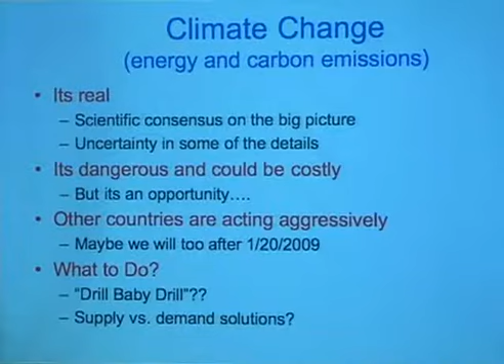The pathway that's missing here, and that I'm the proponent of, and lots of others as well, is the end use side. In our lab we have a $500 million program to develop biofuels, which is great, and I hope they're successful. But where people miss is, where does all that energy go? Why are we building power plants, and why are we doing solar, and why are we doing biofuels? A big part of the answer to that is energy efficiency in buildings, especially if you look at the carbon issue.

Now, there are other options for carbon. There's a lot of interest these days in the nuclear side. I understand there's a big program here on that, there's some work at Berkeley. A little known part of my history is I was once involved in the nuclear field as well.

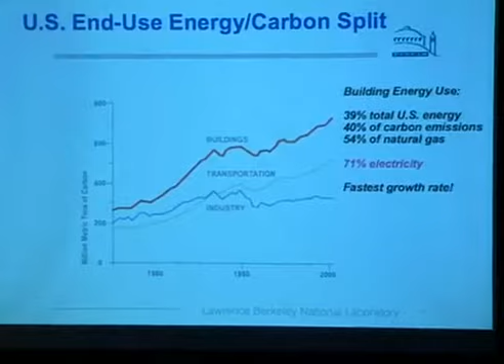So let's talk about the picture. Those of you that are on the building side probably know this, but it's surprising how many people don't understand it. If you talk about what the energy issues and problems are, people think about cars first. But building energy use is the single largest end use out there.

It accounts for about 40% of energy and carbon. It accounts for 70% of the electricity. So it's a huge issue, and it's also the fastest growing area.

By the way, all of these comments are as of a year or so, or the last six months to a year. A lot of things are changing in the building sector now, as they are in the rest of the economy. In the long run, though, these fundamentals aren't going to change very much.

If we then look at the buildings problem, we're back to the same issue: your perspective on this depends on who you are and how you look at the problem. If you ask a utility person what the energy in buildings problem is, you get a very different answer than if you ask a building owner, an architect, or an engineer.

That's a challenge, but it makes it an interesting one because there are lots of different ways to approach the problem. It would be nice if there was a silver bullet—do one thing and solve the energy problem in buildings. The answer is, it's not possible. At best, people have used the term 'silver buckshot.' You need lots of different things to tackle lots of different parts of the problem.

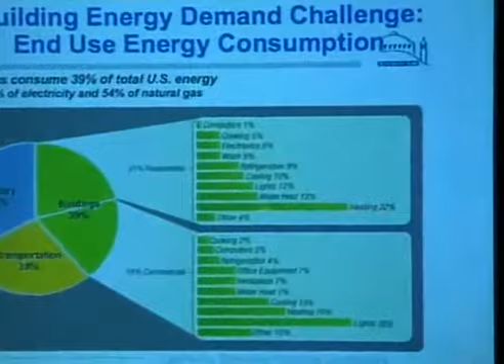That's because if you drill down and break this 39% of buildings into residential and commercial, you find that although there are a couple of biggies—heating in homes, and heating, cooling, and lighting in commercial office buildings—the energy gets used in lots of different ways. If you're going to tackle this problem, you need to understand and ultimately tackle many of these different issues simultaneously.

Stepping back for a second, you look at this building sector—it's diverse and fragmented. The way buildings get built is very complex, with lots of people involved in the decisions. There's not one person to go convince to do an energy efficient building. There are dozens or hundreds. The decisions involve large amounts of money and long periods of time.

It takes—a building like this might take 3 to 5 years from the time someone says, 'let's build it,' to the time you occupy it. Lots of decisions get made there.

And then there are lots of different subtleties in the sector. If you own or lease a building, the dynamics are very different than if you rent or lease it. Buildings are different by region and by type—a restaurant is very different from an office building. The thing that unites all of them is that the potential for savings is enormous across all of these.

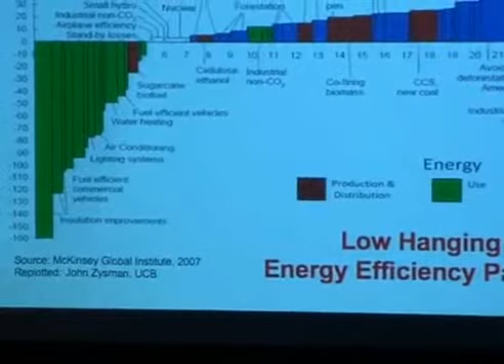Which is good news. Now, there are lots of studies out there—there have been for the last decade. A few recent ones, like the McKinsey study, some of you may have seen. What this is doing is estimating, on the horizontal scale, the amount of carbon—meaning energy—that could be saved by various actions.

And then it does an economic analysis on the left scale here of the cost. This happens to be in euros per ton of carbon, but think dollars per unit energy, dollars per unit carbon. What you see is rather striking: a whole bunch of things that cost you money.

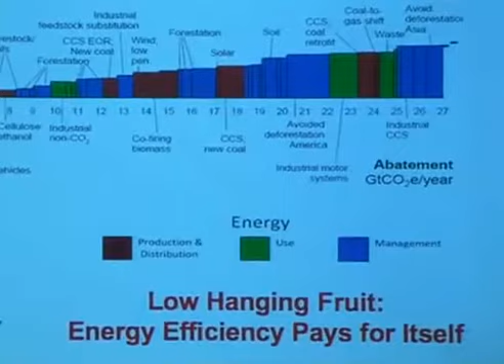Solar, reforestation, carbon capture—all this stuff out here will save a certain amount of energy, and it'll cost anywhere from $10 to $30 or $40 euros per ton of carbon. Look at the things over here that are highlighted in green—these are the things that pay back. They don't cost you anything over time.

And essentially all of these, almost all of them—there's a vehicle one in here—are things to do in buildings. So if you want to save relatively large amounts of carbon, 5 or 6 gigatons here, you can invest in energy efficiency in buildings, and the good news is it pays you back.

So the standard argument here is that this is the low-hanging fruit. This fruit isn't even low-hanging—this fruit is on the ground, and it's been on the ground for so long it's actually rotting at this point. I mean, why wouldn't a rational person make these investments?

You can get 10, 20, 30% ROIs here. Why wouldn't a rational person do that instead of getting negative 20% on your local hedge fund or something? But this has been in place for a long time. McKinsey published this last year.

Those of us who have been doing this for a while have published things like this for a very long time. It's important to understand this, because when you talk about technical potentials, they're huge, but then you scratch your head and say those potentials have been around for a long time. Why aren't we capturing them? And if we're going to do even more, we need to be thinking about that clearly.

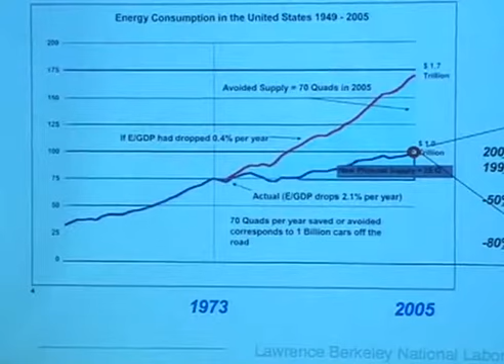Now, the good news is we've actually captured some of them. Here's the energy use in the economy. This is total energy use from the 40s or 50s up to 1973. The blue line is actual use. Something structurally happened around 1973 - the first oil embargo. If you look at energy use per unit GDP, had we continued at that rate to the current time, it would have been the red line. But in fact, it was the blue line.

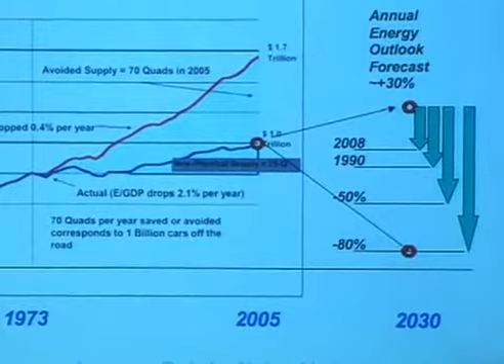So at current costs, we spend about $1 trillion a year on energy. We would have spent $1.7 trillion. So we're currently saving $700 billion a year because of the work we've already done in energy efficiency. The bad news is we just gave away that $700 billion to the banks, but that's an annual amount that gets regenerated every year.

Now, where are we going in 2030, which is a convenient number? It's far enough out to do something and see some growth. If you project current growth, you get a 20 to 30% increase out to 2030.

What people are arguing for - Kyoto says let's get back to 1990 levels. California has a requirement, actually by our Republican governor, to reduce carbon emissions by 80%. Actually, that's cheating a little bit - it's out to 2050. But massive reductions out into the future.

So we did this for a while. We did that for a while. Now what we're arguing is we need to do that for a while. We've never done that before. Never been done in history. It's a big change. It's doable. That's the good news. The bad news is you aren't going to do it by business as usual.

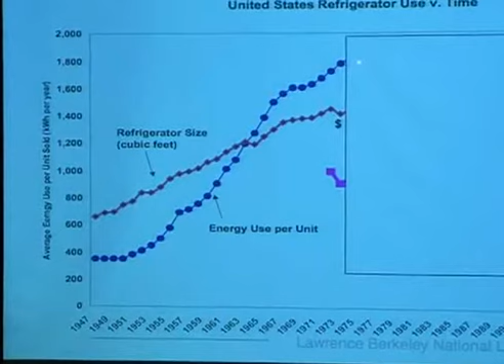Energy use per unit fridge showed a monotonic increase for all that time. Partly because they got bigger, but notice the slope of this is greater than the slope of the increased size. This is amusing too - of course if you extrapolate the size of refrigerators 50 or 100 years, they get bigger than houses. The real constraint, I think, is the size of a doorway in terms of what you can move through.

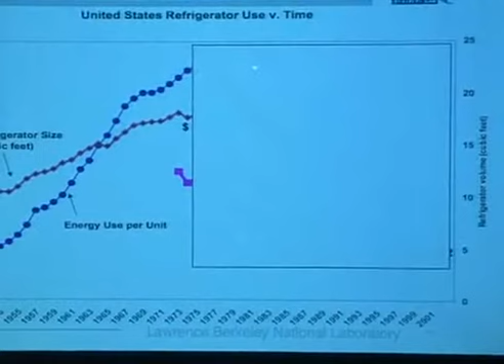Anyway, anyone want to guess - I'm going to pull away this blank piece of paper here. What does this energy efficiency curve do? Does it rise? Obviously doesn't rise too much because it's off the chart here. Does it rise? Does it slow down? Anyone want to hazard a guess? Some of you have seen this before, right?

Dramatic reduction. Okay, fridges today - a fridge you buy today uses about 20 to 25% of the energy of one you bought in the mid-1970s. And that's a lot of R&D and good product development and good design.

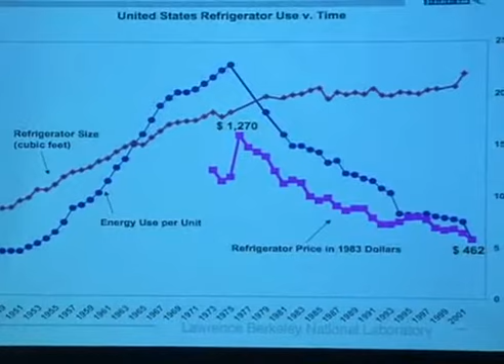And then you say, okay sure, but we did it by vastly increasing the cost of the refrigerator, making them unaffordable to everybody, right? But look at the cost of refrigerators - these bounced around in 1970. The cost in constant 1983 dollars has gone down as well. So bottom line, we saved 80% of the energy use of this energy-consuming appliance, and we did it at lower cost.

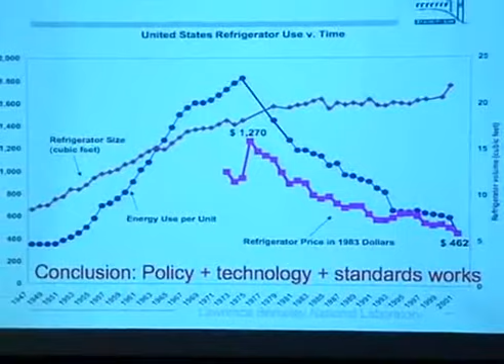So simple question: if you can do it for a fridge, why can't you do it for a building? Why can't you do it for the whole economy? One reason is how this was done - it wasn't done by innovative R&D guys saying let's just do all this R&D and put it in the fridge and hope you all buy it. A lot of it was driven by policy and mandatory standards, and I could do a whole talk on that.

We have a big group at LBL that does policy. We helped develop the new appliance standards for DOE for the last 25 years—there's 5 or 10 appliances like this, not all as dramatic. What happened was the states and the feds decided they were going to mandate it because it was cost effective. They did it, they worked with the manufacturers, and that's the end result.

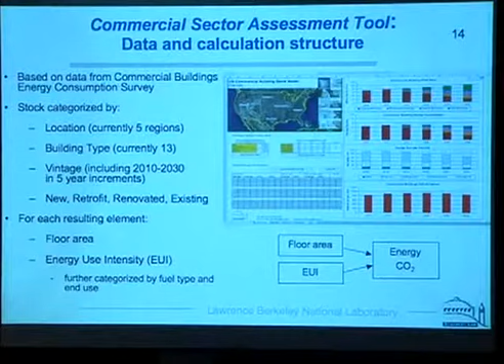So one of the things we've done is a lot of modeling and simulation of individual buildings in the sector. This is a spreadsheet tool we put together to basically look at the energy use efficiency or the energy use index of all buildings and the floor area, and project them out into the future to look at energy and carbon. This model works by building type, by vintage, and so on and so forth.

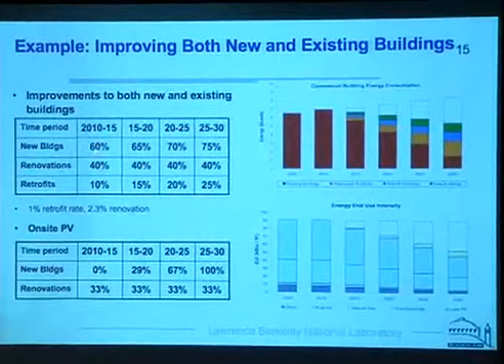Let me show you some results here. So here's a scenario, 2005 and 2030, where for each 5-year time period we make some assumptions. New buildings in the next 5 years are 60% more efficient than they are now—they use 40% of what they use now—and by the time we get out to 2030, they're 75% more efficient, using only 25% of what they are now. We also make assumptions about renovations and retrofits, and about the remaining buildings putting some PV on the roof.

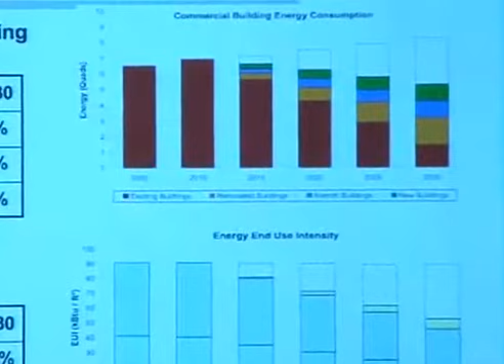And again, this is a spreadsheet, you can play with it. So this scenario generates this stock sector curve. This is business as usual—it would have grown by about 25%. And in this scenario, we end up with savings of about 30 to 40% compared to where we would have been today. And then this shows how the end use breaks down.

The yellow here is solar. So with this as a model, we've done a lot of simulation and modeling. Oh, I want to make one more point here.

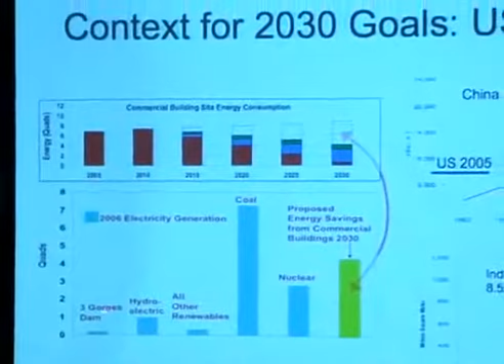So what does this mean? Here's a version of the curve I just showed you. The amount we'd save in 2030 is roughly - this is a little bit cheating because it's compared to today's use - more than the entire output of the nuclear power plant fleet in the U.S. today. So we can save more in the next 20 years than the entire nuclear system puts out today. It's about half of all the coal-fired power plants in the U.S. today, and it's far more than all the hydroelectric, all the renewables, Three Gorges Dam in China, and so on.

Now, China's interesting because as important as it is for us to do a good job in the U.S., if China and India don't do something similar, we'll never get our way out of the carbon problem.

Here's some growth curves for China and the U.S. The U.S. commercial building stock is around here in square footage and growing at a pretty slow rate, 1 or 2%. The Chinese growth is up in the double digits, maybe a little bit less these days, but massive increases. And if these increases in square footage aren't done in a super efficient way, then we might as well start building the dikes now, I guess. The same issues apply in India, more complicated.

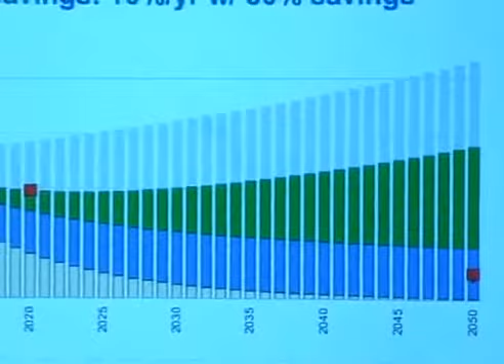So here are those models I was looking for. Here's business as usual. This is the California 2020 goal of reducing energy use by 20%, and the California 2050 goal of reducing it by 80%.

And here's a scenario where half of all the new buildings built save half of their energy. That sort of seems like it might be plausible with some work. And every year we retrofit 10% of the existing stock with 50% savings. Again, I can pick anything I want here - we picked a number of them.

We picked this one because it happened to meet the 2020 goal. But the reason I put it in was because this isn't all that aggressive on new construction. And if you then go out to 2050, new construction, which is the green, starts growing, and you end up actually at a higher level than you are back here.

If you say, well, how do I meet Arnold Schwarzenegger's 2050 goal, which is here, you need a scenario like this. And look at how aggressive this is. Buildings built today save 60%, and they save 90% by 2030, the rest being PV. Retrofits are 50% savings now and up to 80% in 2030. These aren't doable today with the cost and the technology we have.

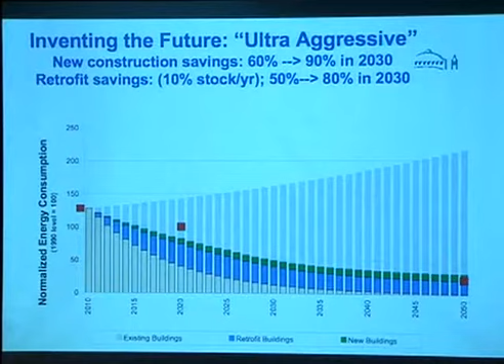They could be doable in the future. But it gives you a sense of how aggressive you need to be if you want to meet goals like this, which is great. It's a target if you're a researcher or a business person looking for new market sets.

Now let's come back to the real world and look at what's really going on with real buildings. This is the grounding part of this. So this is another scale.

This is an energy use index scale, and I'll be switching probably back and forth in units here over the course of the day. KBTU, 1,000 BTU per square foot, is a metric all the architects and engineers know. The average U.S. commercial building is about 90 today. If everything was built to code and it worked, you'd be about 20% better than that today, at 70.

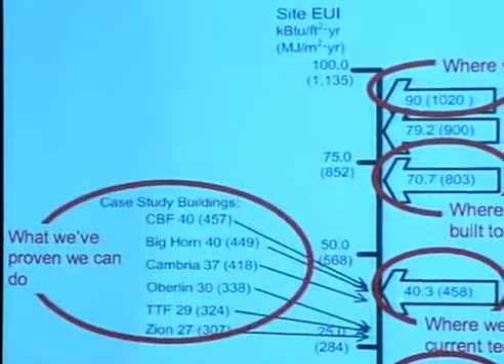There's a bunch of interesting buildings, some of which have been monitored out at NREL, these 4 or 5 here, with measured energy use down around 40, which is less than half of the current stock, which is good. And this net zero building, or the conceptual definition, would say get it down to 10 or 15 or 20, and then provide the remainder with PV or wind or biofuels to bring it down to zero.

So that's an interesting number. I'm going to come back to that in a minute. Here's a different way of looking at the problem as well: energy use by building type, or by buildings, and the number of buildings. This represents the entire stock in the US of 5 million commercial buildings. This is a representative sampling, but indicative of the full stock. So the average is around here - here's that 90 number I talked about before - and you see there's a long tail out here.

There are buildings that use 3 or 4 or 5 times as much as the average, not unexpected. Some use much less here. So what are we talking about doing?

If I look at a building here, and you tell me you have a building with metered energy use of 230,000 BTU per square foot, I actually don't know if that's good or bad. If it's an office building, it's terrible, it's 3 times the national average. If it's a data center, it may actually be quite good. So unless you know more about the details of the building, you can't tell offhand whether these are good or bad.

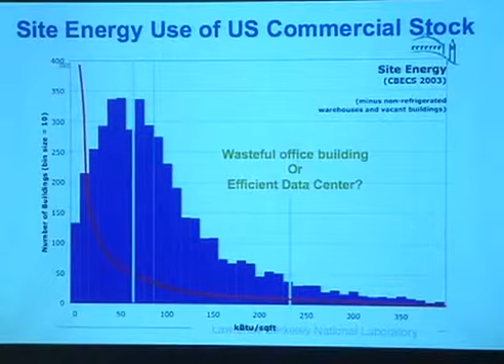Here's that code requirement. This red line is where we need to get to by 2030. We need to basically shift the entire building stock by factors of 70 to 80% to the left. Again, very difficult to do, although plausible.

So let's look at another population of buildings. Many of you know there's a U.S. Green Building Council meeting in Boston this week. They're out there pushing green buildings, and part of green buildings is energy. It's not the only part, but it's part of it. So they took 120 or so odd buildings that have been certified by USGBC at different levels. How many of you know about LEED ratings? Okay, most of you. You get certified silver, gold, platinum, depending upon how far you get up the curve.

And here's the measured energy results of those 120 buildings. The best ones are down around 20,000 BTUs, this is the number I used before, 20. Here's that 90, that average I talked about before, the average of the US stock. And there's some out here.

So there are a couple things to note here. One is that about a quarter of all these buildings are worse than existing stock. That's not very good. About half of them, or the average of them, is about 70. But remember, 70 is where I said buildings would be if they simply meet building code.

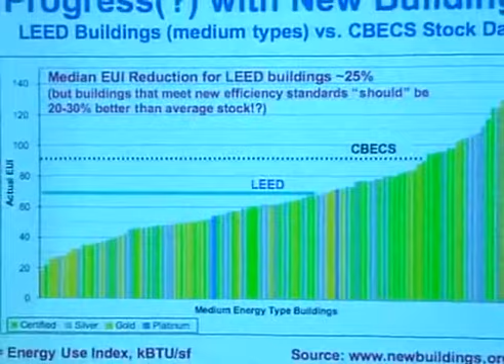As soon as I talk to an architect and say, do you do energy efficient buildings, they say, yes, I design to the energy building codes. And my comment is, if you meet the building code, all you're telling me is that you've designed the worst building you're legally allowed to build. If it's any worse than that, you can't build it, right? The building code is a minimum. And so if you meet the building code, you've met a minimum requirement. There's nothing great about that.

So the average LEED building is doing what theory tells you a code-compliant building will do. Probably that's a reflection on the fact that code-compliant buildings don't really meet code-compliant levels. But that's another whole story.

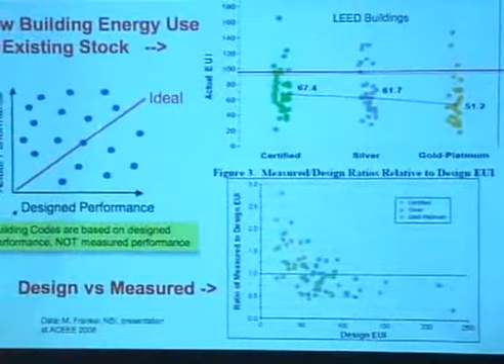Here's the data. So if all the buildings were along this line, they'd be along this line here. What seems to happen with this collection of 100 buildings is the ones that had higher predicted use actually ended up with lower. But all those ones where people said, gee, I'm going to come in at 30, 40, 50 at the low end, actually came in at 1.5 or 2 or 2.6 times higher than predicted.

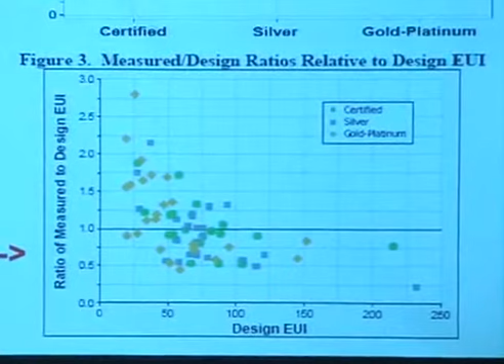And there's a lot of reasons. That could be lousy design, it could be lousy tools, it could be great design, great tools, lousy construction, it could be all the way up and then lousy operations. So again, it's a fairly complicated thing. The reason I'm showing this is because in the end, we have to move away from hope and wish and prediction from tools and look at measured reality, and that'll be a theme I'll get to later.

So I gave a talk a few weeks ago to some architects who are focused on the architecture, engineering, construction part, and the big missing piece here is operations.

If you don't think about and act on the operations part, we're never going to get to the goal either. I'll talk about this later in more detail. We need measured building performance, the right metrics to track performance, and tools that operators can use to understand and manage use in real time.

So what do I conclude from all this? We need massive reductions in buildings, and this net energy goal is probably a good one. There's a lot of data floating around out there, not necessarily in the right form, but it's useful to understand what's going on. We need to make this distinction between our intent and actual performance. Although the goals are attainable, they're really challenging, and a lot of the last part of my talk is going to be about how we solve those problems.

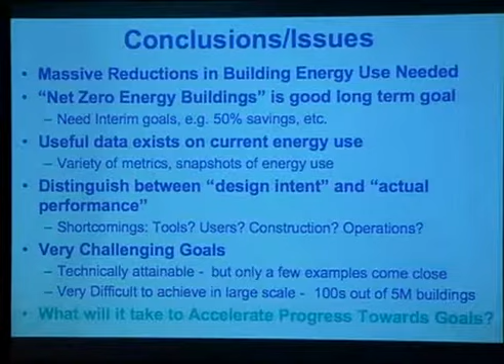One other comment: the same group, NBI, did a study of buildings that save 50% of their energy, and they found a couple hundred buildings that save 50% of energy, out of 5 million buildings out there. So again, you can find examples, but you can't find very many of them. This gets us back to, okay, we know we can do it. Amory Lovins once said that if it exists, it must be possible. So efficient buildings, zero-energy buildings are possible, clearly, but not at scale.

So who's trying to change the world here? Some of you have probably seen the Google take on the world. There's RE less than C, which is to produce renewable energy at less than the cost of coal. That's a great initiative, I hope they're successful. I think they're missing the big problem, which is buildings.

But how do we get to zero here? This is overly simplified, but I think I said this before: cut the demand in half, reducing it down to something people can understand without being researchers. Cut the demand in half, satisfy the demand with double the efficiency, and then take the quarter that's left and deal with the carbonless stuff that Google will help us produce.

So I think as a researcher, and I presume a lot of you on the research side, there are all these innovation challenges here, which I'll talk about in more detail. But I don't want to lose track of the fact that there's policy, economic, and political innovation. I think we have a great opportunity here to be innovative politically in the next weeks, months, or 4 years as well. So I'm going to go through some of these issues in a bit of detail.

I always get asked, well, what does it cost to do a zero-energy building? Because cost is important in the real world. And the answer is, it depends. So here's a simple way of at least understanding the boundaries. I'm picking two parameters I think are important: one is building size, small buildings and large buildings, and the other is climate.

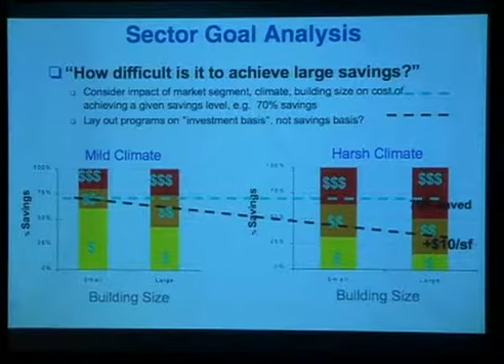The other thing about cost is this: energy in the building sector is a $400 billion a year problem.

So take your salary, multiply by 2, divide by your office space. That'll be a number, I think, like 3,000. If the number's much higher, then you're either paid too much or your office is too small, and if the number's much lower, it's the opposite. But it goes to the point that if you do something to save energy and you reduce the environmental parameters in the space where you work, and you reduce productivity by even a tiny fraction, you've blown it in terms of productivity. A 1% change here dwarfs or equals or exceeds the full cost of energy.

The flip side is the part that I go for, though. If I can do something to improve energy efficiency that improves comfort, reduces glare, improves the thermal comfort, and I get any kind of marginal increase in productivity, even if I can't measure it, I've got a big dollar saver. So this is a point that people need to pay some attention to.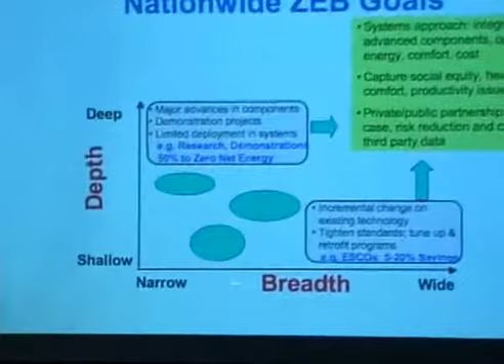So I've mentioned scale a number of times, and this is just a convenient way to talk about scale. There's things we can do. We can look at widespread impacts versus narrow impacts, and small savings versus deep savings. So all of you know what ESCOs are, energy service companies. You can hire one, they'll come into your building, they'll pay to retrofit your lighting, and they share the savings. They typically get 5 to 20% savings. You can do it in any building out there. The Clinton Climate Initiative is aggressively pushing it. Great stuff. But it basically has shallow savings, potentially very widespread.

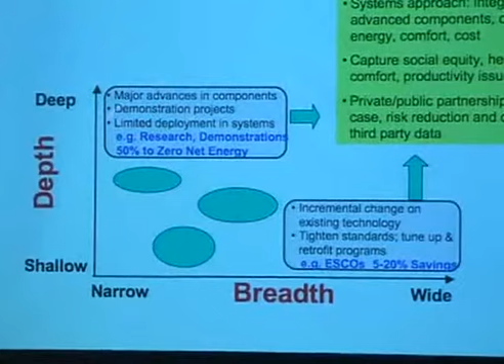If you do a demonstration project, a zero-energy building today, almost by definition, is almost a demonstration project. It's one of a kind, big savings, but one of a kind. So we've got the extreme up here and the extreme here. We want to be up here. We want large savings, but widespread. And that's sort of the theme here of, well, how do we do that?

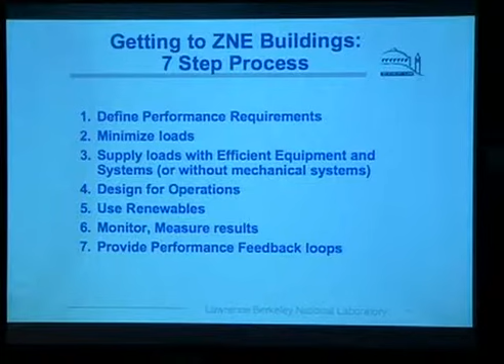So I'm going to go through some examples of systems, technology, and some process issues that I think are relevant. It won't be comprehensive - I'd keep you here all night. But we'll walk through some of them and see what lessons learned there are.

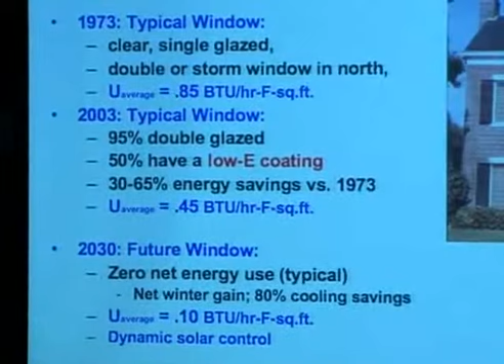But in fact, it's the delta between these that's the operative number. We're going to save about as much energy going from here to here as we did going from there to there. And we'll get into this solar control part. So the good news is we've made progress in 30 years. There's a lot more progress to make in the properties of window systems. What kind of impact would that have?

If you do a calculation of all the energy used by windows now in commercial buildings, it's about 1.3 quadrillion BTU. This is worth about $20 billion today. And by implementing a variety of technologies, existing and future, this is where research comes in - I could save about 1/3 of all the energy used in these windows by deploying stuff we already have in place today.

But I can save not only more, I can actually get the window to be a net producer. The trick here is these windows are providing daylight that allows me to turn off the electric light. So I reduce the heating and cooling to zero or near zero, and I now have a net benefit on electric lighting. This takes me from a $20 billion cost to a $15 billion savings - these are annual numbers. The catch here is this is if I could magically change every square foot of every window in every commercial building.

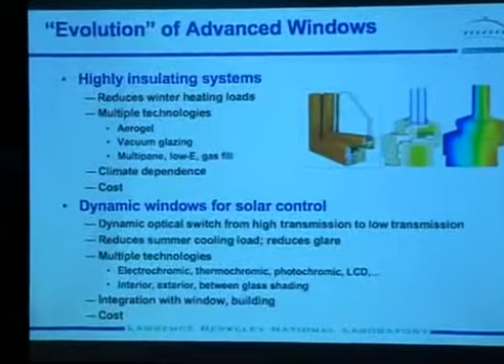So here are the two big issues for buildings: insulation and dynamic control of solar gain. What you want to do is make these windows much lower heat loss in winter, to the point where every window is what we used to call a passive solar window, where the sunlight on even a cloudy, or the diffuse daylight on a cloudy, overcast Boston day in the winter balances the conductive loss. You can actually find windows like this in Europe today - triple glazed windows with gas fills and argon - and you could invent vacuum and aerogel.

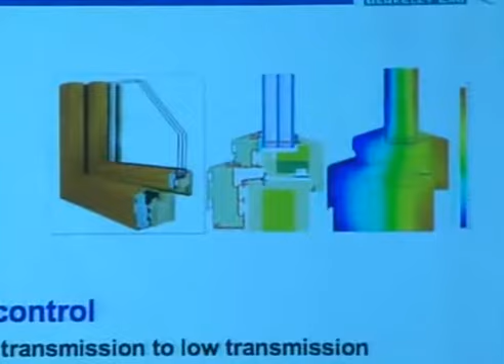This is R&D going on in all these areas now. The right window is climate dependent, and there are some cost issues. On the dynamic side here, managing the solar heat gain through the window, which adds to the cooling load, is critical, but letting the daylight in is important too, and I'm going to talk about these in more detail.

And that window in much of the US basically breaks even. It becomes a net zero energy window, in the sense that its heat loss and gain are balanced in the winter. This is the technology stuff that does it. I won't get into the details.

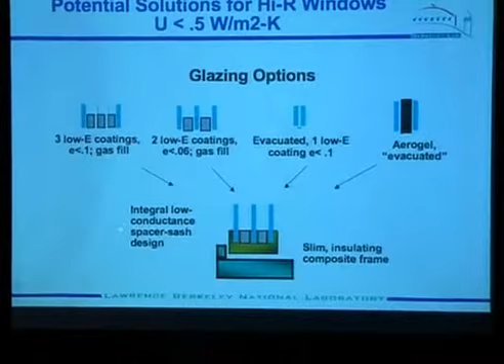More technology stuff. But the problem here, you've got to deal with glass coaters and window fabricators. There's a whole bunch of different players in the industry. No one company makes all these components. Part of the challenge is when you make a coating, you have to convince the glass guy that the coating works, and then convince the window guy that assembles the whole thing that the coated glazings work. Cost is an issue with all these things too.

The second issue is solar heat gain. On the one hand, you want windows to be transparent. You want the view, you want the daylight, you want the solar gain in the winter. On the other hand, windows are a huge problem with cooling load. Minimizing glare is important. So what you'd like to be able to do is control the sunlight and the daylight that comes through - the spectrum, the intensity, the distribution.

So the first one we do a really good job on. There are coatings on windows today. These are called spectrally selective cool coatings or glazings. They're thin film coatings, sub-micron thickness applied to windows. They're less than $1 a square foot. Every U.S. manufacturer makes them.

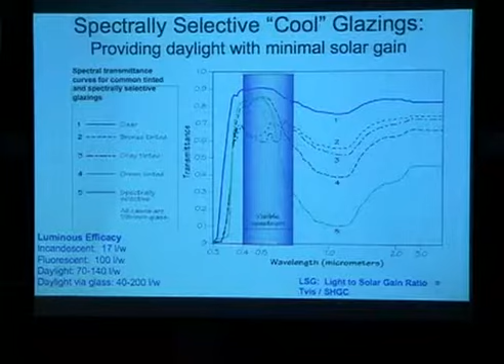They take - this is the spectrum of a conventional clear glass. Here's the solar spectrum. Here's the visible part, here's the near-infrared part. Half of sunlight energy is in the visible, half is in the near-infrared. This is clear glass that lets through both visible and infrared.

As an extreme case, this green coating is one of these special coatings. It lets through almost 80% of the light in the visible spectrum and about 20% in the near IR. So this has a very high light transmission. It looks clear, but it keeps most of the sunlight out.

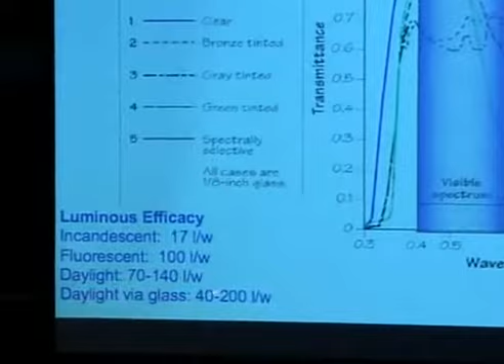And if you talk about the efficacy of a light source, the lumens of light produced per watt of energy, incandescents are way down at 17, fluorescents are 100, and daylight through this glass can be twice as good as the best fluorescent. If we were more on the architectural side, we could get into the details here, but I won't.

But the other problem is - that's a good thing to do in most cooling-dominated buildings. We want to use that all the time. But the big issue here is dynamics, and things change with location, with orientation, with season, with weather, with occupant, everything. So you really want something that changes dynamically.

And there's something called a roller shade or Venetian blind that will do that. That's why they were invented. In a big building, you want to be able to do probably a bit better than that. The glass folks have been looking at smart coatings. Here's another material science challenge. This is old stuff in the sense it's been discussed for 20, 30 years.

Photochromic glasses, you may have sunglasses that do this - light sensitive, heat sensitive. These react to the environment. I want a coating that I can control. Actively controlled electrochromics seem to be the best option out there. It means I need wiring and power and control, but in the end, the benefits we think are worth it.

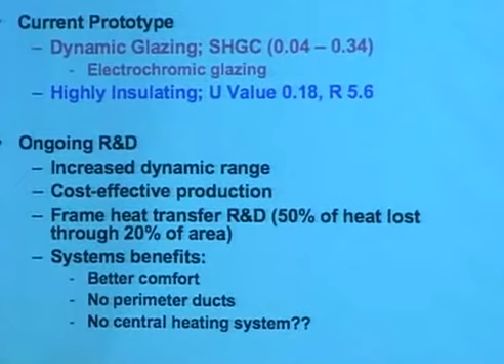There are some manufacturers beginning to offer the technology for buildings and for cars. Here's some prototypes we built with one of those manufacturers showing going from 60% light transmission to 3% light transmission and a good reduction in solar heat gain.

We made this with a highly insulating window, so it was both a highly insulating window and a dynamic window. Again, unfortunately, much too costly to be affordable in anything other than a demonstration.

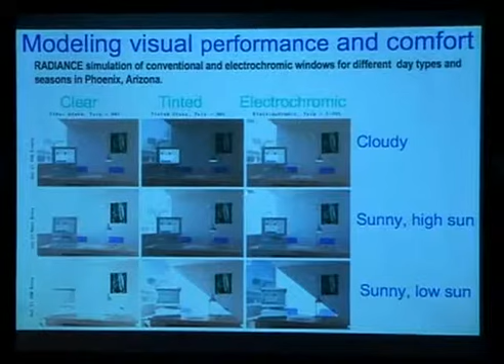But on a sunny day, you're able to manage the glare. You reduce the transmission by a factor of 2 or 3, and then by a factor of 10. You get basically good visibility of the computer screen under all conditions. And you can't see the screen here, and you really can't see it very well here either.

So this is a technology that saves energy and saves cooling, but it also improves the comfort and productivity and visibility of tasks, which is important.

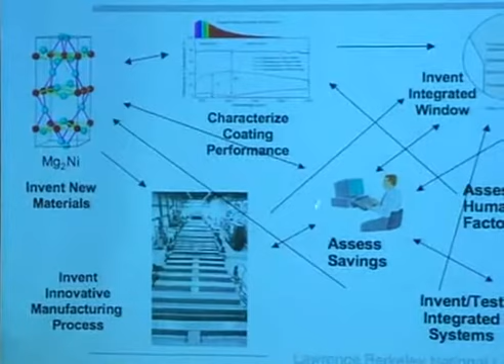So you do material science research. You work on the production side, because if you can't make them at very high rate at very low cost, they won't be cheap enough. We model their performance to assess how well they'll work. We build devices to characterize the optical properties, figure out how to put them into a whole window system.

And then we get out in the field in both test buildings and real buildings. And even though we've done all this modeling and simulation and analysis, you've got to get out and find out what's really going on in the real world. We actually have a whole set of facilities that have been custom designed and built for these purposes.

This is a GSA building in Oakland. We convince people, we charm them or convince them to let us use their building for a year or two. And we usually promise to return it to the condition that it started before. But anyway, this was a good experiment about 10 years ago. There were a lot of flaws with this particular product, but we learned a lot from it, and the new ones that have come out are better.

I'm going to come back to some of this stuff in an example a little bit later.

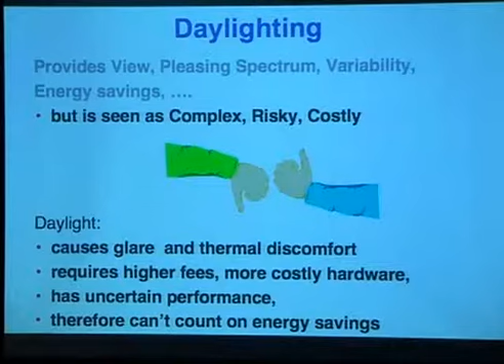So the other big thing I've mentioned several times is daylight. Daylight is seen by all architects as something that's useful and great and important. But there are challenges with it as well. And there are technology-based solutions.

Here's a Japanese company that's invented this elegant and extraordinarily expensive tracking fiber optic system that does deliver daylight into a building, but it's not remotely cost-effective.

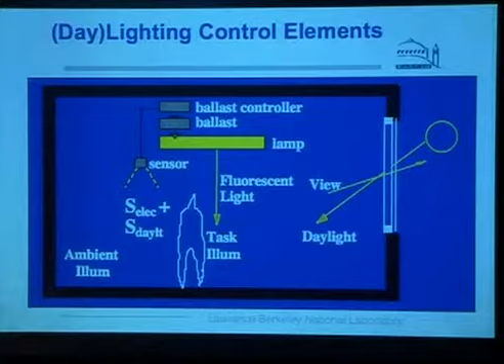In 1990, we retrofit a 20,000 square foot building with these daylight dimming controls, and we made it work. So here's the energy use days of the year, energy use before, energy use after on the south and the north side. Interestingly, the lowest consumption, and the big savings, are on the north side, not the south side.

The reason being that on the south side, you've got this glare problem with sunlight. People close their shades and don't always open them when the sun goes away. So you don't get as much savings in this case on the south side as the north side. So this taught us some lessons about the need for smart shades as well.

We think there's enormous opportunity in the daylighting area. A lot of the stuff that's being used today, well and poorly, is good old 19th century reflective and refractive optics. Nothing wrong with that if it works.

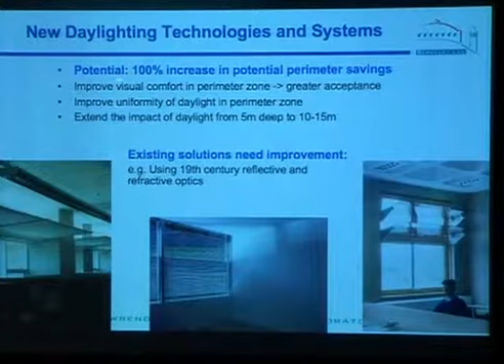But you need probably more than that. These are just architectural examples and product examples of things designed to redirect light into buildings. The big issue is also to increase the amount and usefulness of daylight at the perimeter, and then bring that perimeter deeper into the space. And it's a real challenge to do it with the materials we have today.

There's a lot of interesting work going on at a fairly low level in terms of new types of optical materials. One of the big challenges is how do you characterize them. Marilyn's lab here at MIT is doing some of the leading work to try to solve that problem. If a manufacturer puts out a brand new material and you can't characterize it and tell an engineer how to simulate it and predict its performance, they aren't going to adopt the material. So this is a critical part of the big picture here.

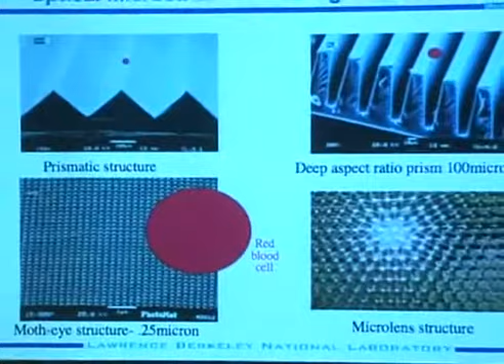And for those of you in the material science area, there are all kinds of interesting opportunities. The scale here—this is a red blood cell—gives you the scale of these microstructures. They aren't quite nanostructures, but microstructures that could be used in various ways to control or redirect light.

But the bigger picture here is this integration issue, again a concept diagram of a perimeter office where you've got the glazing and the shading. You deal with comfort, you're dealing with lighting, maybe a special glazing to let the daylight in, maybe some PV here. And we're connecting this now to the grid and the utility to make sure we're managing energy use in a way that not only makes sense in the space, but makes sense in the bigger outside world.

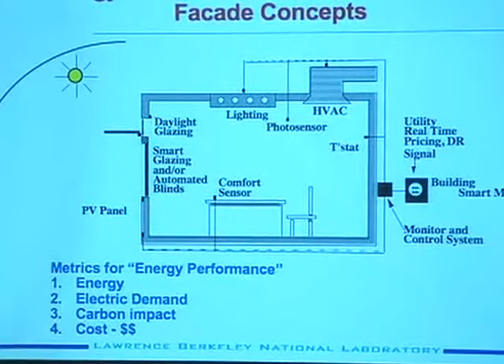This gets you into the interesting issue of what are the right metrics. Is it energy? Is it comfort? Is it dollars? Dollars may not correlate with energy depending upon the utility rate structure. Is it carbon? And this gets us very much into the controls issue.

So what we want conceptually is this. I mentioned before that the building we did 20 or 18 years ago, people manually operated the shades and the blinds. There's nothing wrong with that. I work in an office with a manually operated shade, and most of the time I'm smart—actually, I'm not smart enough to operate it to save energy, but when the sun comes in at 3 in the afternoon and I can't see my computer screen, I get up and I adjust the shade.

So what we're looking at here, conceptually, is stuff that will do this ideally automatically, reliably, cheaply. These smart controllers deal with the window system, the lighting system, and they have to be smart enough to deal with task requirements, preferences, conditions, weather, and so on. This is actually not a trivial challenge to make it work, and not just to make it work once, but to make it work reliably at a building level.

And the other question is, if we get into controls—and I'm emphasizing this because I know there's a lot of interest and capability at a place like MIT—there's the engineering side of controls. How do you make something that maintains a light level? That's relatively easy to do. How do you make things that adapt automatically without getting a technician back into the space to reprogram it and change the optics and do this and that? And how do you get something that adapts to user behavior in an appropriate way? Those are interesting research challenges.

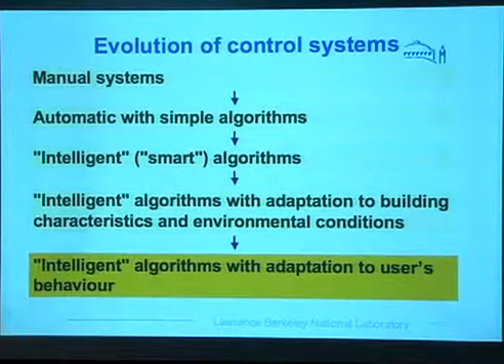This diagram actually came from some colleagues of Marilyn's from Switzerland who are looking at this problem and having some success. This is a facility we operate to test these facade systems.

We used to have the electrochromic coatings here; now we're testing automated blinds and shades. Some of this is about the engineering performance of the shades and blinds, but some of it is about how people use and work in the space and what they think about the environment inside. So we're trying to do both of these at the same time.

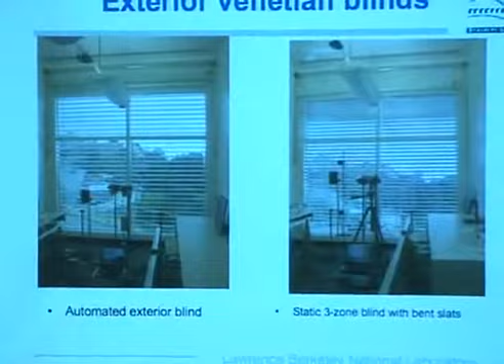These are off-the-shelf units procured from Europe—again, this is not rocket science. This is a blind system that blocks glare on the bottom but has a different slat tilt that lets light in to brighten the ceiling and allow the lights to be turned off. Conceptually easy, hard to find in the market, hard to control.

The window tends to pump the light down here, which tends to create glare on the computer screen.

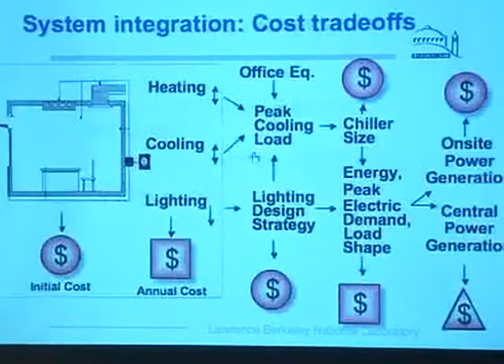So a lot of what I've just shown you is kind of the research lab side. Does any of this stuff work in the real world? We get involved in projects, and I'm going to show you an example of a project here with that.

One of the big issues there is cost, though, and I just want this one slide on cost first. So here's the classic view of cost. Here's that room with its stuff, and I'm going to add a bunch of things to it that increase the cost - the smart shades, the daylight dimming - and reduce, hopefully, the heating, cooling, and lighting. I take this annual savings and divide it into the first cost, and I get a payback.

The interesting thing, though, is that the decisions I make here impact the peak cooling load, which impacts the chiller size, which isn't free. I'm the owner, I'm paying for the chiller. And the chiller then creates incremental demand on the utility grid, and someone's paying to build power plants out here.

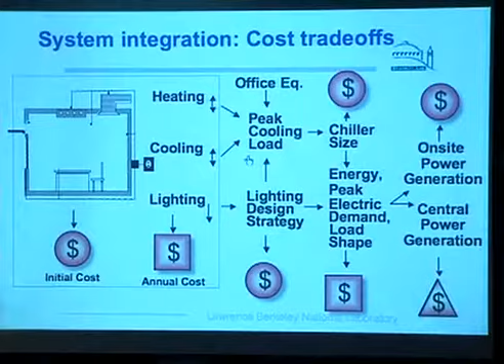So if I can somehow get the cost trade-off to be on the full system and not just in this blue box - if I now do an aggressive electrochromic coating or automated shading system here that reliably reduces the cooling load, I can make this smaller, and that smaller, and somehow try to take the dollars from here and the dollars from here and put them back here. So that's the challenge. It's hard to do because most engineers won't do it, because they don't believe those systems will work reliably - and they don't believe it with good reason, because in many cases they haven't.

Well, they wanted the city to see how news is made, and so on. They came to us and said, look, we've got all this glass, we know we have a lot of daylight, but how do we control glare? How do we do the cooling load stuff? How do we make sure people can see their computer screens? And they went to their consultant and said, give us an integrated system that will do all this. And their consultant said, A, it can't be done, and B, even if you could do it, you couldn't afford it - that's why I mentioned the cost issue before.

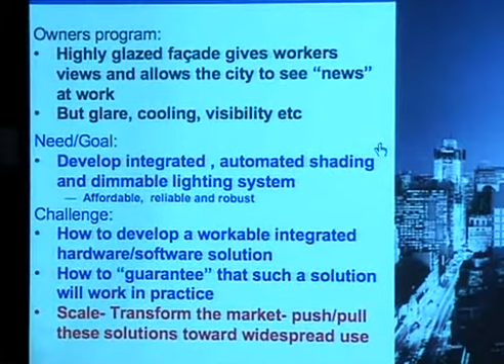So they had actually seen some of those studies I just showed you before that we had done, and came to us and said, what do you think? They said, you've done it, why can't we just do what you've done? And we said, well, we did it in 100 square feet - or 500 square feet. You want to do it in 1.5 million square feet. There's a bit of a difference there. But we agreed to work with them.

What we did was we convinced them this was complicated enough that they should build a test bed. They built a 5,000 square foot test bed in New York. So here's the floor plate of a building - this is the 5,000 square foot piece that they built. We completely outfit it with a series of different dimmable lighting systems, motorized shade systems. They put in three or four furniture systems, all kinds of stuff. We developed a bunch of new instrumentation, not just to measure the engineering parameters, but to measure glare on the computer screen and a bunch of other things. And we did this for, well, 12 to 18 months.

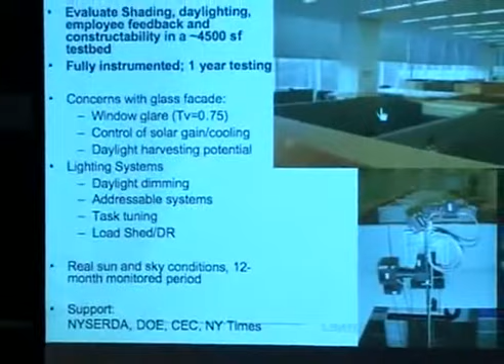I probably should have said before, most of our work is supported in the public sector - the U.S. Department of Energy, the California Energy Commission - and it's organizations like that that have been investing with us and others for a long time to make these things possible. In this case, NYSERDA, the local energy agency in New York, did it. Out of this, rather than just picking a winner, we came up with a performance specification to bid into the marketplace. The other thing was we did that testing in this mock-up on one corner of a parking lot.

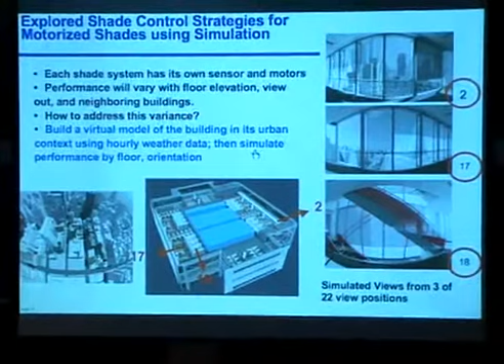Then we said, well, what about the other corners of the building? What about the height of the building? So then we switched to simulation.

So we used field tests to do the integration work, and a lot of simulation and modeling. Lots of other innovative things were done in this building, but the job wasn't done.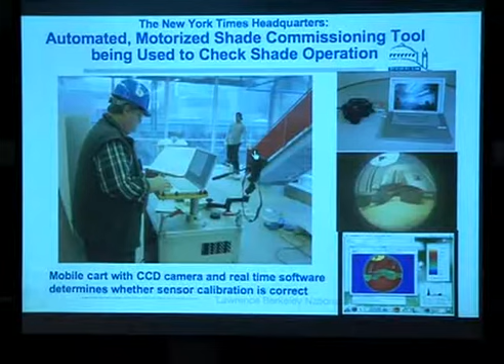So then we bid it, and the cost came back at 1/3 the cost they'd been quoted originally on the dimmable systems because of the work done here. But this is a complicated system, so we also built a commissioning system so they could install it and calibrate it right, and delivered that, a little cart with some technology, to the owner.

Here's the final building in operation. Shades are pulled, the lights are dimmed or turned off. Seems to be working pretty well. We're trying to get back in it and do some measurement there now.

I think I'm going to skip some of those details. There's a lot of debate going on about glass buildings. I don't know if the architects in the room are into this or not, but architects are using a lot of glass in buildings, and a lot of the rationale for it is green and energy savings. It's not always clear that that's the case.

This is the way I think about it: you can do glass to just meet the code, and there's not much thinking to do the code—it tells you what to do. There's a broad middle of the market where there are somewhat prescriptive packages, but medium-sized or modest-sized windows, double glazing, spectrally selective glass I talked about before, some type of simple operable interior shading, some type of simple on-off light controls. If you're going to do lots of glass, highly glazed buildings, then in my view you need to do a much better job on the tool prediction part.

You need to make sure you've got all these things integrated. You need some form of dynamic smart control on the shading, certainly capture the daylight, the dimmable part here, and make sure you're dealing with people as well as energy. This takes extra time and money, but I think it can deliver a product that will really work.

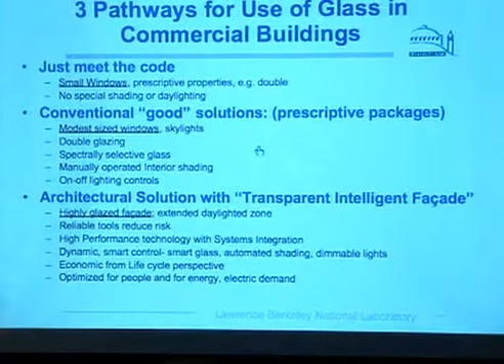The theme in lighting today is get better sources. How many of you have heard of LED lighting? Everyone's heard of LED lighting. It's promoted as the most efficient thing out there, right? Well, it is getting to be much more efficient, and it will continue to get more efficient. It's also very expensive, and most people don't believe it will be an option for overhead lighting for another 5 to 10 years. It's great for task lighting and other small things, but it's very expensive.

And what we're trying to do now is save a lot of energy in the next 5 or 10 or 15 years. So what we should be doing is paying a lot more attention to controls. You should be using light only when you need it, where you need it, and meeting user needs. Sounds pretty simple, but it implies a controls infrastructure that doesn't exist in most buildings.

So we're arguing that lighting should be dimmable and addressable. You should be able to communicate with and talk to any light fixture anywhere in the building and tell it to control its output. If you have the enabling technology to do that, then you can implement any strategy and change those strategies over time. That's interesting.

My machine just told me that PowerPoint quit, so let's see what happens. Hasn't happened before.

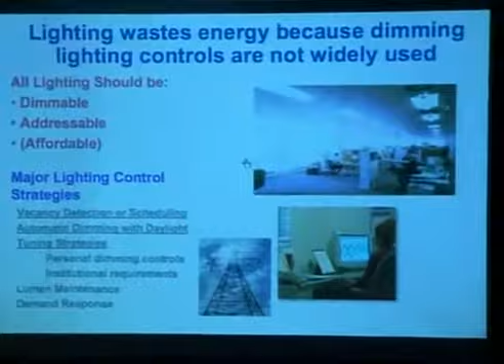In Europe, there are efficient standards called Passive House and Minergie. For the last 3 or 4 years, Passive House in Darmstadt has included in their conferences a couple of tracks on extremely high performance retrofit, gut rehab retrofit. Where in the United States is gut retrofit energy savings efforts to save 50 to 80% going on today?

I don't think you're seeing any major programs with that. I do think there are individuals doing things like that, but not at the programmatic level. I think those are things that potentially might be implemented as new initiatives for a new administration. The issue is whether the pieces are in place to do that. There are some groups out there that have the smarts to do that.

I'm going to, hang on one second, I'm going to try this a different way. It's just frozen. How about more questions while I... Oh, there we go. Okay. Oops. Yeah. Sorry. Does it work?

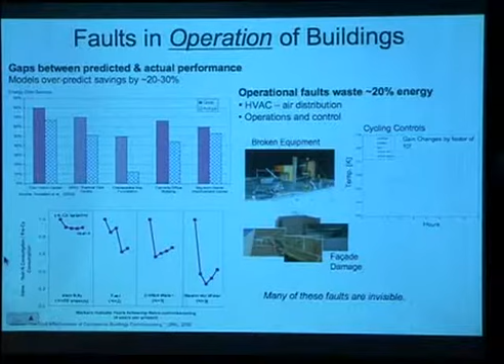Talked about operations of buildings. There's all kinds of issues in operations. You've got a group here in architecture, Leon Glicksman and Les Norford, who are doing work in this area. Important, interesting area. Fault diagnostics and self-tuning. Again, if we're going to add all these new sensors and things in buildings, we need to make them better.

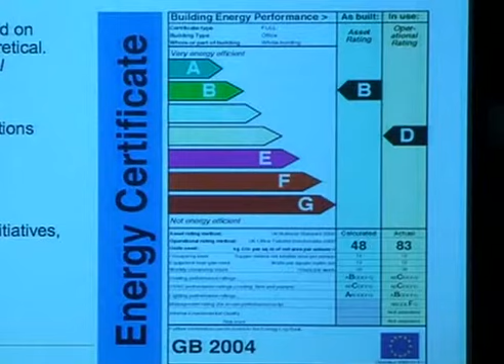So here's this, your question about what's going on in Europe. A lot of benchmarking of buildings. I won't get into the details here. Here are the certificates that the Europeans are using, and we're going to do something like this. The main point I want to make is that you have to distinguish between an asset rating, which is as designed and built, and an operational rating, which is how people use it. And I think that's a critical piece of the whole puzzle. If you don't do that, you can potentially be in trouble. So we're aggressively moving in that direction.

Here's a case where they predicted the lighting energy use would be 14, and the actual was 43. It turns out there's a bunch of different factors, all of which influence that, and you need to understand that at some level of detail. So that's where we think things need to be heading.

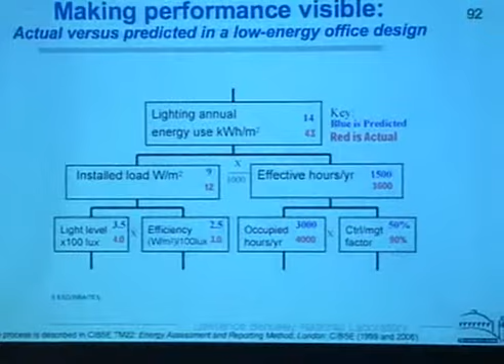California spent a lot of money building a big database. We have access to that database, and we've developed a new tool. You can look it up at energyiq.lbl.gov. It allows you to explore performance characteristics of buildings, and this tool will be used as part of that energy cost thing I showed before.

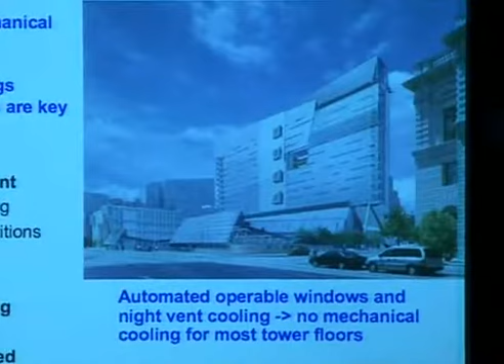I'm going to skip this system stuff. Here's another example of working with a real owner to implement some things. This building has no mechanical cooling and 12 floors. That's unheard of in the US. It's a Class A office building, a GSA building. It relies on openable windows that are automated and an exposed concrete ceiling, and it's in San Francisco. The cool night breeze blows over.

We did extensive modeling with CFD and with Energy Plus to convince the owner that there would only be a few hours per year when the comfort conditions in the space would drift above the required levels. But based on that extensive simulation, they went ahead and designed and built the building.

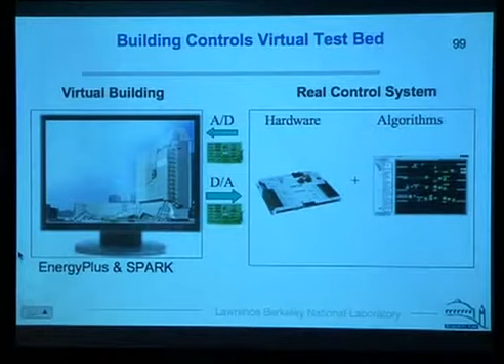There's an interesting question of where it stands now. I think it seems to be working pretty well. We're in the process of going back into it to understand in more detail. One of the things we did was couple a real control system from the building with a virtual model of the building before it was built, to work out the bugs which we knew would exist between a sophisticated control system and the software.

This gets us into the whole issue, which again I'm saying in several different ways: we need to think about the life cycle of the building. Too often we spend time on the design side and think that when the design is done, we're finished. But there's construction, commissioning, operations, occupancy, and you're handling lots of data here all the time.

So I don't know how many of you have heard of building information models, BIMs. A few people. This is another one of the up-and-coming buzzwords and realities, a little bit like green. It means lots of things to lots of different people. There's a whole organization out there called Building Smart trying to develop standards for BIMs. But the idea is that you specify everything in a sophisticated model so that the engineer, the architect, the facility manager, and the construction guys all work off of the same building data model.

There's some stuff here on tools that I'm going to skip for time purposes. But if we're going to do more sophisticated buildings, we need more sophisticated tools, and we've been active in that area for a long time.

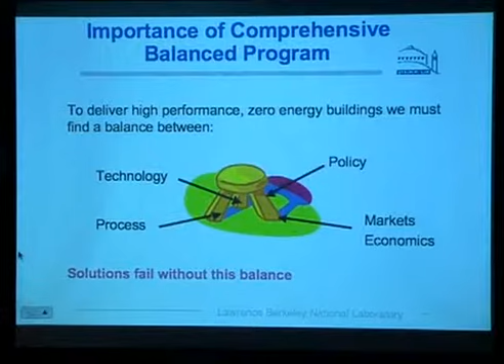So the last few slides here. One of my themes is that we need a package of solutions: technology, policy, process, and markets, if we're going to achieve this zero energy problem. I'm going to make a big pitch here on the policy side. Policy comes in lots of different flavors: mandatory, voluntary, Energy Star programs. You've all heard of Energy Star programs.

There's a voluntary side too. The LEED rating program is a voluntary program. There are lots of different scales. It's actually good to try things at a state and local level first and make your mistakes and fine-tune it there rather than launching it nationally and finding out that it doesn't work. The issue here is transforming markets, and how do you do that?

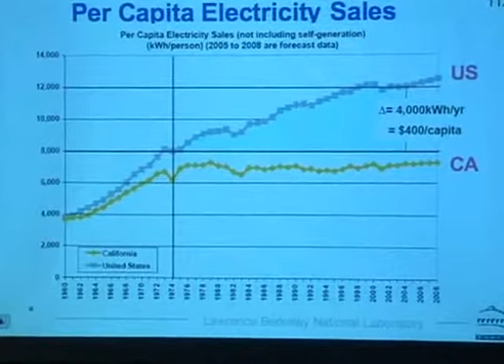Well, here's some data. I'm a transplanted Californian, so I'm not just tooting the horn of California. But here's energy use per person in the US and energy use per person in California. California's had an aggressive set of policies to manage energy use, and there's a lot of other things going on here too, sure, offshoring of stuff and so on, but it's clearly worked. Another way of looking at it is to look at different states. Here's the US average, here's California, just because we've had an election.

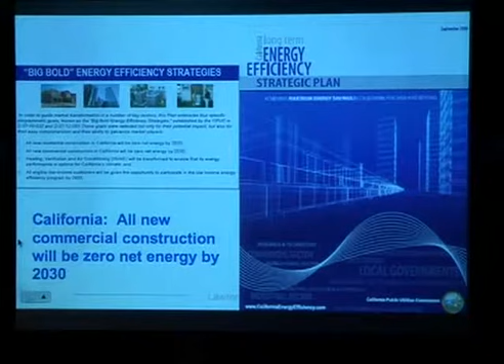The Public Utilities Commission in California has mandated that buildings will be zero net energy by 2030, and they're trying to put in place the infrastructure to make it happen. They realize you can't just say it. They spend about $1 billion a year, which is a small tax on electricity, to run this program.

One thing to be careful of, what to do and what not to do: what we currently do in California is have 11 different programs out there for commissioning and retrofit, plus Title 24 standards and LEED programs. You just confuse owners and decision makers with all this stuff.

You basically need one big program: figure out what you want to do, integrate it, get it right, and do it. Obviously I'm oversimplifying here a bit, but all these things can fit comfortably within these programs, which works both for new and existing buildings.

So the grand challenge here is to look at the life cycle, look at integrated systems, do the technology plus policy piece. I assume many of you are interested in the research and innovation side. The important point is that innovation and research isn't just about the technology—it's about reducing risk, reducing cost and time. In the building sector, these are huge.

Most building owners will tell you in a heartbeat they would far prefer to have a slightly less efficient system that costs less and works well all the time, than something that performs better but who knows if and when it will work and how much it will cost.

So the bottom line directions I'll emphasize here: I think what we need to do now is try a bunch of things. We don't know all the answers. Go out and try things. If it works, deploy it widely. If it doesn't work, fix it and deploy it. Be experimental in terms of policy and focus more on the ultimate decision makers—the owners and operators—and think about scalable solutions here.

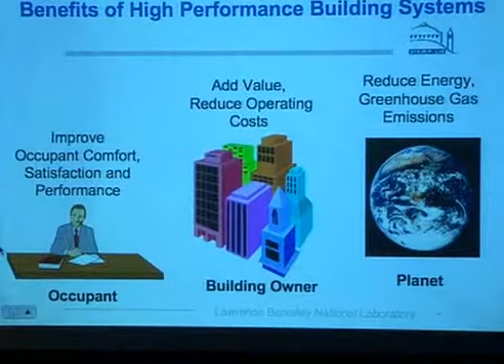And apologies for the little rough spurt there, but yes?

Doctor, when you helped the New York Times build its headquarters, did you essentially create the monster that ate New York—specifically because they now have a metric so that if anybody intrudes with their other real estate project, they can show exactly how much your new building is going to cost their efficiency? And now do they have a legal right to either sue, or do we have a carbon credit system where you use your efficiency law, you'll take the efficiency loss, but the other developer has to buy that loss, or the right to give you that loss?

I think I missed something on the developer side. What's the loss part of it?

Well, if I've got the New York Times building and I've got all this efficiency with the blinds and everything, and then you put another building across the street from me and thereby intrude on my ability to achieve that efficiency, do I have a legal right, and do I have a huge advantage in court and in the real estate industry to really pound you unless you meet my demands?

Yeah, if you look at the zoning laws in cities around the 1920s, 30s, 40s, those were big issues. That's the reason why if you look at New York buildings, you see these staircase-shaped buildings—right to light stuff. I haven't followed that recently. I don't think it would be a big issue in court. They are building a 40-story building adjacent to the New York Times, and the building is designed to be relatively efficient.